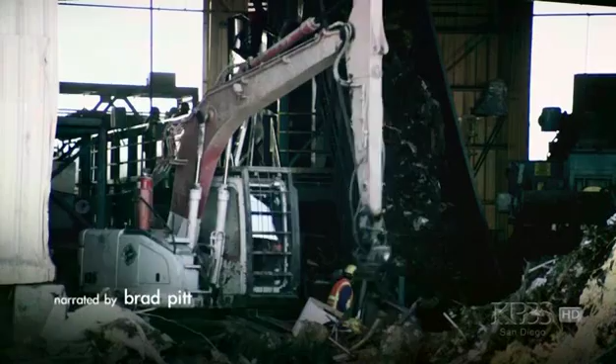What does it mean to be environmentally conscious today? To recycle your newspapers, bottles and cans? Sure. But what about massive construction materials designed for a single purpose? What happens when the job is done? With construction waste consuming 25% of our landfills, is there not a better way to adapt and reuse our engineering marvels? Perhaps the way we think is what needs to be discarded.

Well, the Big Dig was an idea that was hatched back in the early 1980s. The idea was that the elevated central artery, which was built in the 1950s and wound its way through the heart of downtown Boston, was getting old, it was falling apart, and it was overburdened with traffic. So what to do with it? Well, you could rebuild it, or you could put it underground. So that was the basic idea: put it underground and demolish the elevated artery, and put parks and development and new public space there.

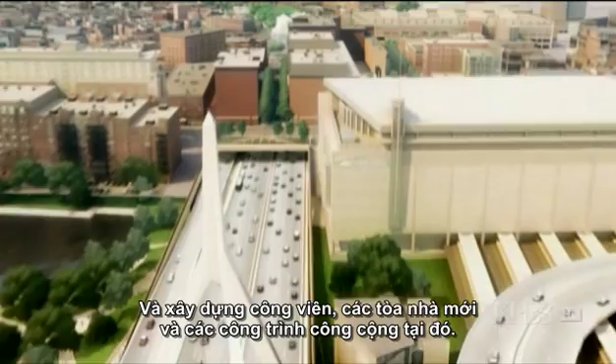This job wasn't just a tunnel. It was building a tunnel through the most densely populated part of Boston, certainly the most valuable real estate in Boston, doing it through corridors of utilities that are mind-boggling, doing it at the same time using the structural elements of the new tunnel to hold up the old elevated highways as it was still being used above. It was an incredible task.

Now, 20 years later, it went from an original price tag of about $2.8 billion to the current $14.6 billion. So it became a very expensive project to build, and there's a lot of cynicism because of the problems, because it took so long and it cost more than they said it was going to.

I think the Big Dig started off with a bang, and the enthusiasm for the project has waned the last few years, but we're really in the finishing stages now, and I think the enduring legacy of the Big Dig—we're already seeing it in that it's improved transportation in the city, dramatically, at least from my perspective. And once the parks are open and the green spaces have been completed, I think the whole affinity for the Big Dig will become much stronger.

Years from now, when that greenway is finished, I think it's going to be pretty inspiring, and Boston is going to be a really special place with that kind of public space and park. But was that worth $14 billion?

Not to mention the waste from demolished buildings, bridges, and temporary highways. The dismantled central artery produced 20,000 tons of concrete and more than 38,000 tons of steel. Who on earth would find this inspiring?

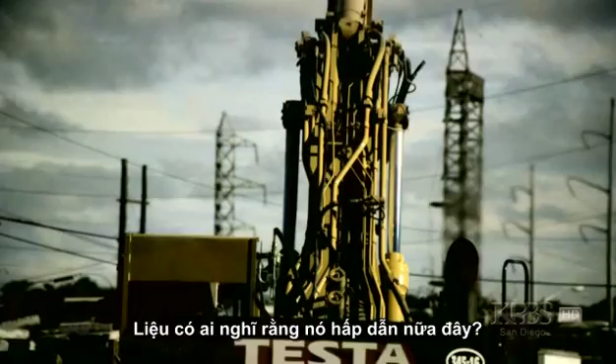I've been on the project for 11 years, so my job actually changed over the course of that time. I started out as a project manager running a single project, which was one of the first tunnel sections. But over the last 8 or 9 years, I've been a vice president of one of the major construction companies in the project.

Well, anytime your project is a federally funded transportation project, there are certain standards that have to be met. Obviously, if it's going to be a bridge that's going to carry passengers every day, it has to be the best there is. And the scrutiny that the materials receive when they're being manufactured is so intense that it guarantees it's the best material you can buy. That's all the more reason it should be available for reuse, because it's great stuff, and it's built to last a long time.

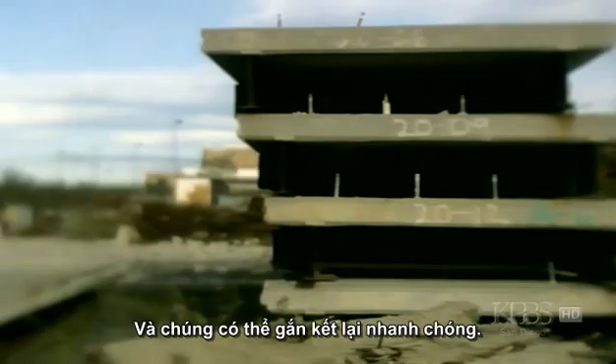These slabs are Inverset slabs. They're specially fabricated for use in temporary structures. When you want to build a bridge quickly, you incorporate the steel beams into the pouring of these concrete slabs, and they can be assembled in short order when you want to build a temporary structure, like the ones we used in the Central Artery.

They suggested that we take the last 40 or 50 panels, break them up and destroy them. I asked if we could take possession of them instead of getting paid to crush them up, and the state agreed. They asked me what I was going to do with the last few panels, and I told them I was going to build a house. Everybody in the room started laughing, but I wasn't joking. The design of the house started to take shape that day.

I knew I needed someone with an eye to help put together the exterior and the layout. I really wasn't looking for the architect when I found him, I was looking for a piece of land. I'd pick a spot of town and run up and down the streets looking for a vacant lot or a for sale sign.

I was running through Cambridgeport one day, turned the corner, and saw this fantastic minimalist house, something you don't see in Cambridge very often. I saw the name on the sign out front, and when I got home I emailed Single Speed Design. I referred to it as Junkyard Wars meets Habitat for Humanity. When he first read it, he thought it was a prank, and he was a little tentative on responding, but he eventually did, and I invited him down to my office.

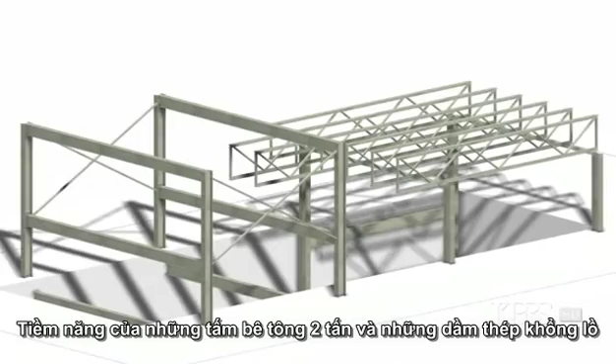We asked Paul, can you put this thing on top, or how much can this thing support? It was simultaneous, like a brainstorming. The potential of two-ton concrete slabs and massive structural steel beams, once considered waste, quickly became a thing of beauty. Or so they thought - the only people who seemed excited about it were Paul and us. We showed many people because we were excited about it, but the reaction was just pure skepticism.

The thing that struck me was when I was dealing with financial institutions. When I first went for a loan, they were only willing to give me half of what I ultimately received because they doubted the marketability of this type of house. They were nervous about the contemporary look of it to begin with, but when I mentioned it was going to be built from recycled materials, their interest levels just went right down.

Real estate people say you should never be the first guy on the block in terms of renovating or starting a new idea, but architects who innovate are always the first guy on the block. They're always the early proposers and early adopters, and they suffer the slings and arrows of outrageous fortune as a result. But they're dogged too - they're on a mission.

So I redoubled my efforts on finding real estate, and we were lucky - we stumbled on the piece where the house is located right now. We were lucky enough that it wasn't just contemporary, not something against the local aesthetic, but there was a covenant on the parcel of land which dictated that a contemporary house had to be built. So we were really happy, and we moved pretty quickly on it.

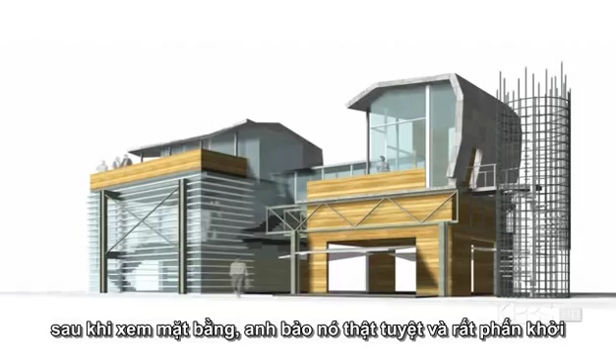I went for an individual meeting with the then chairman of the Moon Hill community, Dick Morehouse, and he was really a wonderful man. He brought me into his house and looked at the plans, and as a professional architect who designed his own Moon Hill house, he said, 'That's lovely, and I'm very excited, but you'll never build that here in a million years.'

So we took that as a no, and we went back to the drawing board, and we tried to look at what they would want, what were the elements of the Bauhaus they would want us to replicate. They wanted us to follow the 40s and 50s aesthetic, and the only exposed structure they wanted us to show were 6-inch round metal columns. We don't have any of those in our building, so that was it.

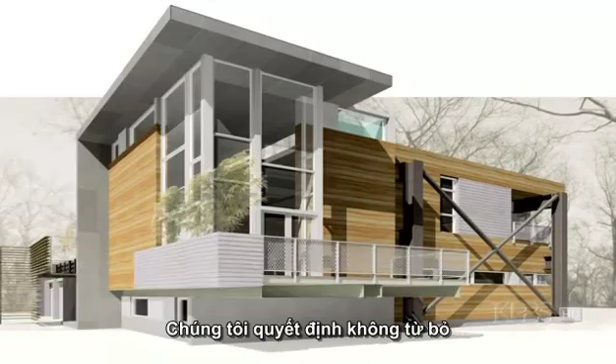We decided we're not going to give up. We'll go back and we'll change it. In fact, John and Ginny, I believe, drove around the neighborhood and picked off key aesthetic features of the other houses, and came back with a design that was eventually accepted.

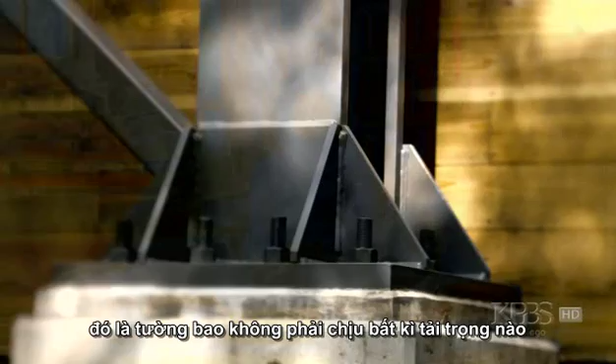Structurally, I think we pushed the envelope as much as we could. One of the things we were free to do on this house was that the exterior wall doesn't have to bear any weight, because the weight is carried by the highway pieces on the columns. So there was a lot of freedom in how we made openings in the exterior.

The thing I wanted to do with the house, and I think John and Ginny and eventually Christina all agreed on, was that we would try to make as big a space as we could. We really wanted to utilize the best characteristics of the materials, which allow you to do big open spaces, so we could bring in an airy feeling inside. The site is really well preserved, with many big trees and pretty beautiful surroundings, so we wanted to bring the nature inside by putting in big windows.

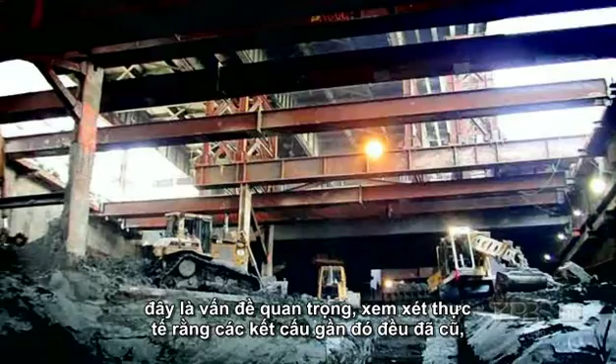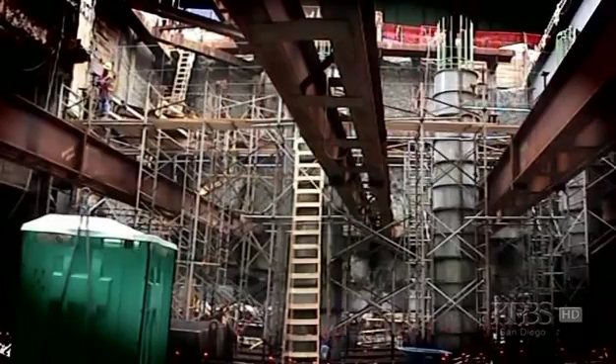This beam was originally one of the struts used when we tunneled through downtown Boston. We put structural walls in, but in order to avoid settlement outside the tunnel, which was a critical concern considering the adjacent structures were historical, we had to install internal braces to keep the walls from moving in. These beams, used in pairs, laced together, were the struts for the tunnel. So we have this point where the beam runs through the wall.

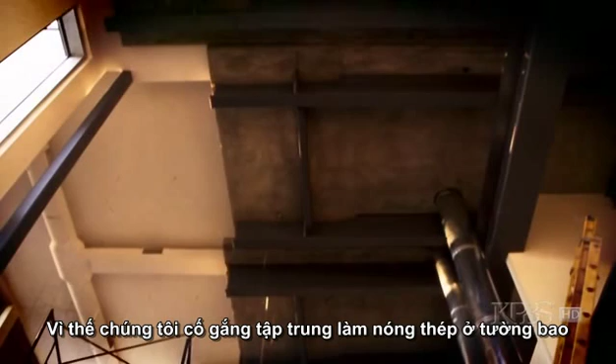Obviously it gets pretty cold in these parts, and outside the steel's going to cool down. We were afraid of the cold intruding right through the steel, so we tried to focus on heating the steel right at the wall interface, and that's what you can see with these raised panels on the webs.

Behind those panels are loops of the radiant system that's also in the floors, and when the temperature outside gets below 40 degrees, a discrete circuit turns on and pushes hot water through those loops, heating the end of the steel beams. It was kind of a technical hurdle we had to clear that became a nice feature as well, since the beams hold heat energy for a long period of time.

Due to the unique materials used for this size house, innovative solutions were a necessity. The beams not only hold up the structure and define its style, but heat the house as well.

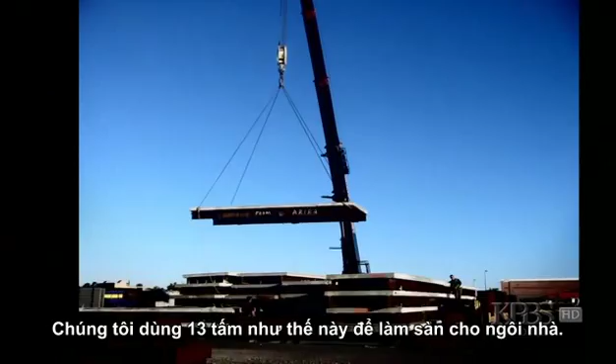When we built the house, we had the entire steel support system built in a day, and we took 13 of these slabs, which became the floor of the house, taking 2 days to assemble. So the whole structure was basically complete in 3 days.

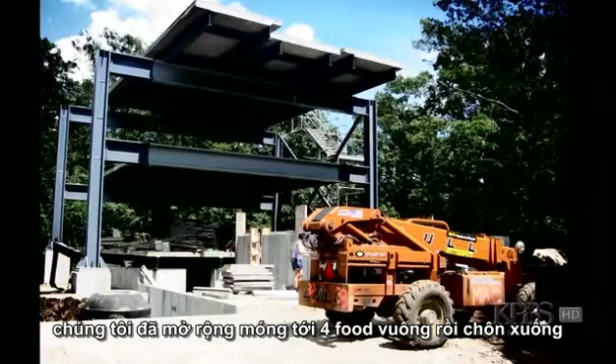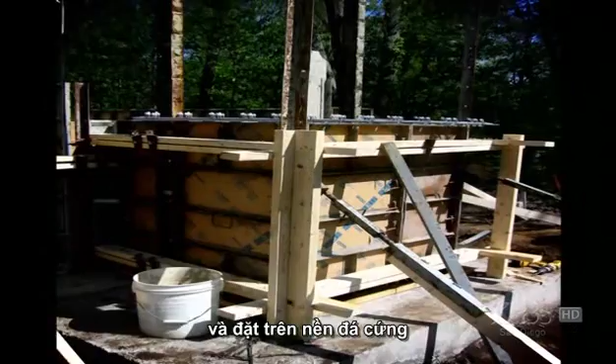We supersized the foundations to 4 foot square, and they go down and sit on a slab of concrete that's 8 foot square and 2 foot thick, sitting on solid rock. So there's zero chance that this house is going to settle. But it's a heck of a lot of weight—we calculate it to be about 500 tons, so about 1 million pounds.

My wife, Christina, is a water resources engineer, and one of her main focuses was to reclaim water. We have the Japanese garden on the roof of the garage, and we thought it would be best to collect the water from that garden. You put a waterproofing layer, as in any other roof, because you don't want leaks. But before putting your soil, you have to put a drainage layer that also filters the water, so it doesn't contain any suspended particles. That water goes into a cistern, and then you just pump it back.

He's reinventing this Bauhaus idea, this American utopian idea, by using discarded highway parts. I think that's what's so wonderful about this project, and the projects that are supposed to come out of it, is that it's wonderfully fresh thinking, adventuresome thinking, and it's both tied to modernism's roots while at the same time very much looking to the future.

I think we fit in. We push the boundaries, obviously, a lot. We have the steel showing outside the house, and those were things that made certain people nervous in the beginning. But now that people have become used to it, it's the feature of the house that people tend to notice.

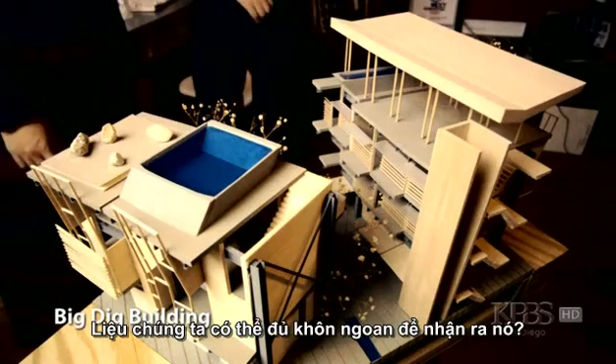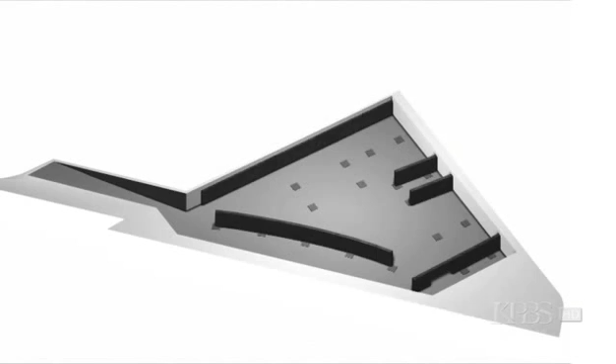Metropolis started the Next Generation Design Competition in 2004, and John Hong and Jinhee Park from Single Speed Design entered a housing project — actually a housing development with multiple housing — based on the raw materials they had mined from the Big Dig. The judges were saying that if we're going to talk about sustainability, we're going to have to also think about tighter development. So Single Speed's proposal, reusing the structure of some of the Big Dig, made it into a beautiful housing, which is, by the way, extremely beautiful.

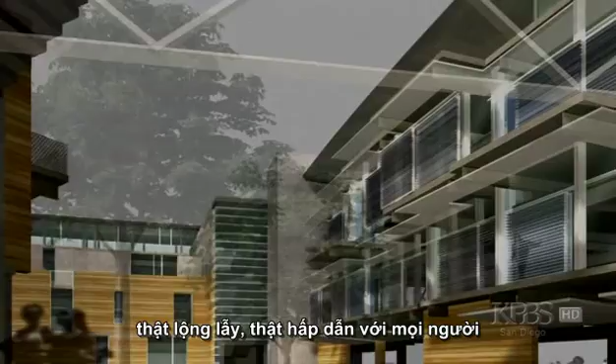That was so compelling to everyone that it just swept over every other project, and so they won the $10,000 prize that Metropolis offers to develop a big idea. It was a kind of public recognition, finally, that the idea was possibly legitimate, possibly a good idea.

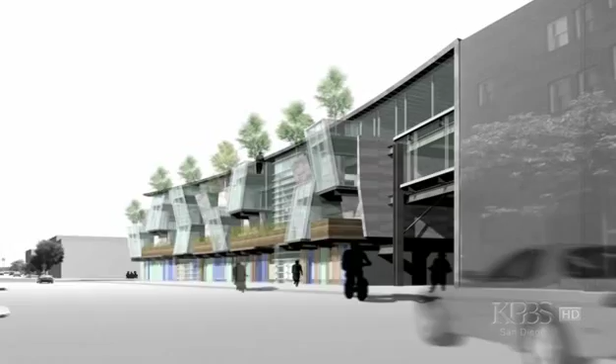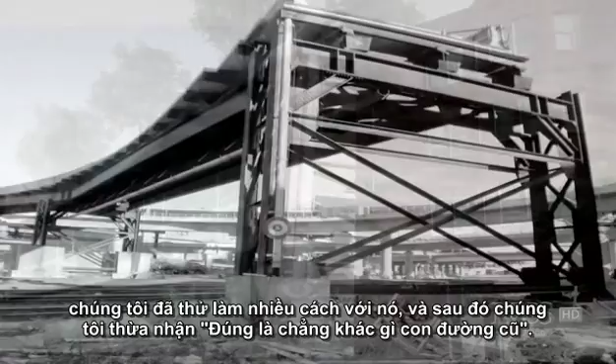Once you get larger in scale, it's that much simpler to assemble it. You save that much more time, labor, and materials. If you fit the pieces in their most natural way, it's basically rebuilding the highway. That was one of the revelations in the project. We were trying to do so many things with it, and then we admitted this thing is a highway. Let's just assemble it. And all of a sudden, it was curved, it was elegant.

We want to celebrate the materials, and we want to express the beauty of the material too. So it's not just about recycling our cans and bottles, even our old highways. It's about recycling the way we think, taking our old ideas and giving them new life, and tapping into possibilities

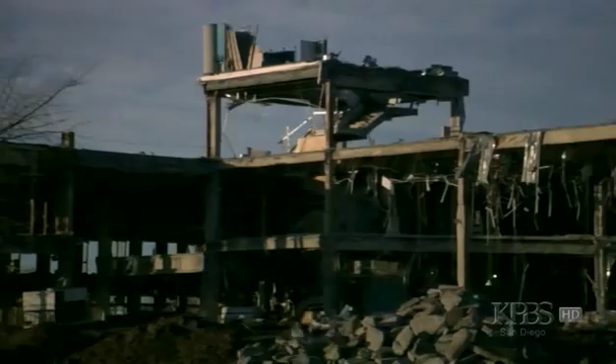that are limitless. I think the idea is growing, and people are looking at this as a very interesting solution to the garbage problem, the construction garbage problem. I mean, it's a huge issue. And when we stop labeling it and just do it and call it architecture or call it really good design, then I think we have achieved something.

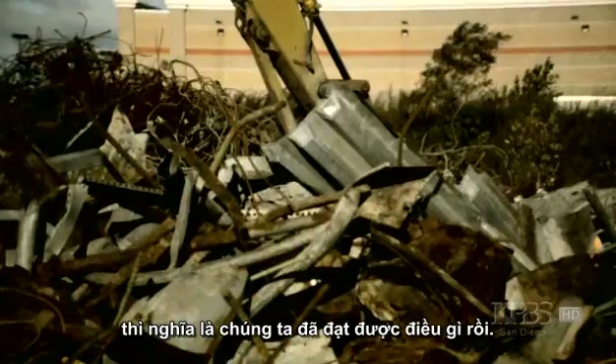When they built the temporary bridges on the artery with these structures, they did so with the purpose of disassembling them. It will be quick to take them apart. There's no reason why any structure of this type, anywhere in the country in the future, can't be built in the same fashion.

There should be a mandate that any temporary structure would be designed with materials that could be easily reused. And if I could take it apart as easily as these slabs were taken apart, throw them in a truck and take them to another place, there's no end to that cycle. These materials will last hundreds of years if they're properly maintained.

But it's usually because it's too big, or it's the way it was attached to the original structure. You have to pretty much destroy it to free it up. All you need is a little bit of thinking in the beginning, so that first structure goes together with the intent of taking it apart. And that's where I think a lot of progress could be made immediately.

There's materials everywhere that if you just look, you can find them. I don't worry about supply at all. I think that regardless of what city you're in—we're taking down a bridge right now in Charleston, South Carolina, and there's 27,000 tons of steel that are going to be produced by that bridge. And jobs like that are happening every day.

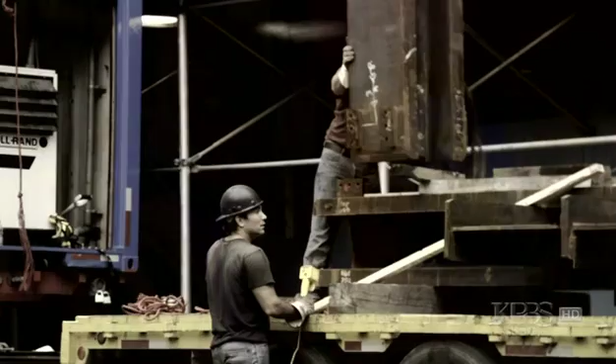Over 60% of the world's energy goes into building, heating or cooling, or dealing with the construction waste of buildings. And buildings themselves, just in terms of the amount of space of the planet's surface that they cover, actually have a big impact on the environment.

I think that there is this growing awareness that we should be taking more care in how we build buildings and making sure that they have less of an impact on the environment, and that they're more efficient in terms of the energy use. Adaptive reuse—we've been talking about that a great deal for decades now, and I think that's part of the sustainability story: you use what you have and where you have it.

So whether it's an old building that's perfectly adaptable to a new use and lives on and creates a whole new environment for new uses, or whether you use the materials that are available to you, like the materials of the Big Dig, those are all really important to think about.

Anything's possible. Anything's possible. And you shouldn't disregard any possibility in thinking. And it makes sustainable architecture exciting. And that's, I think, the value.

I think we enjoy the fact that people are excited about the house, but I think it's more important that people get behind the idea behind the house and start looking at the problem we have with all the waste that we're creating on projects like this, and come up with creative ways of reusing it.